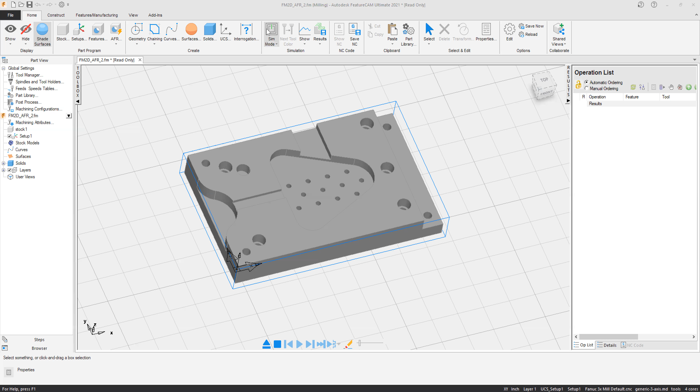You can see some projects with pockets and holes available on the model. We have an option called Features, and within that there are options called AFR and Directed AFR. AFR will automatically recognize all the features in the model and generate the toolpath, while Directed AFR lets you do programming on selected operations.

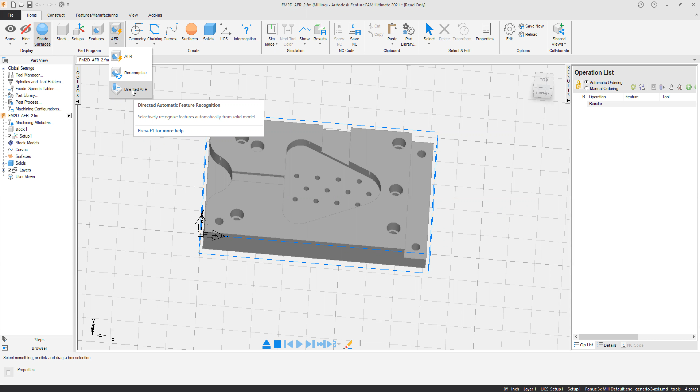Before that, I'll show you how to do the setup for this model. You can go to File and import any kind of model - it supports importing all file formats free of cost.

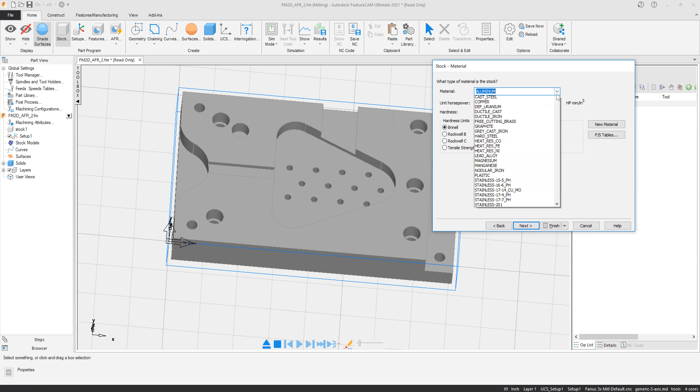Once you import, you go to define your setup called the block. You can define different shapes of blocks and select different materials for what you are going to cut. FeatureCAM automatically selects the tool speed and cutting parameters according to that. Then you select no fourth axis and finish.

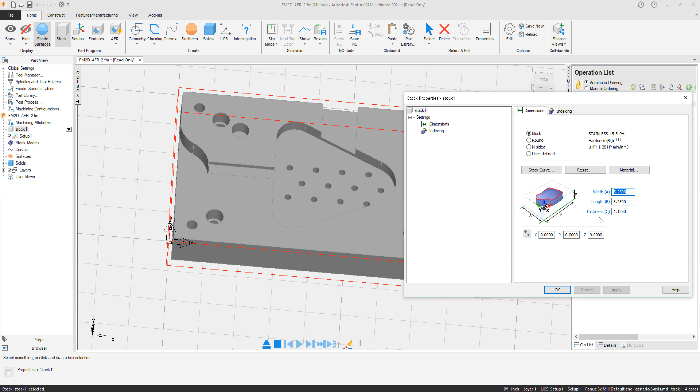Now you can see the block is generated. If you double click on the block, you can see the size - X, Y, Z. These three sizes are available to define the block.

Once you've defined the block, it's very important to define the setups. Click on Setup here and give the setup a name. Then you set your zero position - normal, front, left, right are all available, or you can click the icon as well.

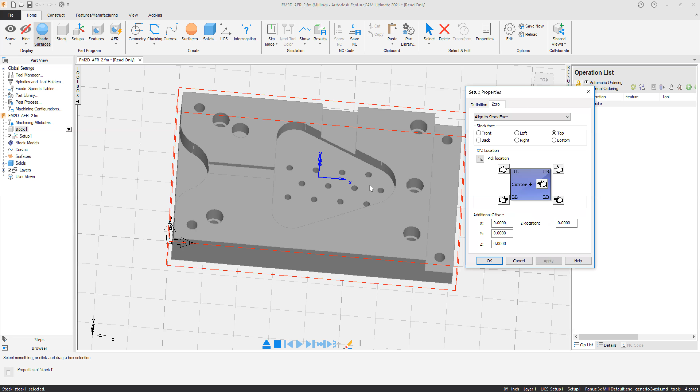Now my XY zero is set to the center in X and Y, and Z is on top. You can also pick any point to set it, or move the XY coordinate using these options, or set it to the left corner, right corner, or center - these are the five options available.

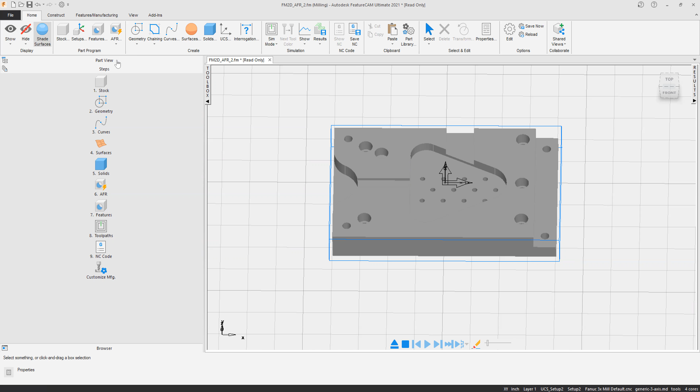Once you set your work plane, you can go directly for toolpath creation. In the steps, you can see the option called Features - there's AFR, you can go for AFR, or it's also available here, or you can go to the Part View, which is also available at the top.

I will go for the Directed AFR. Then we can select it here. It asks what kind of profile you want to recognize - only holes, bosses, or pockets. Suppose I untick all other options and want to do only the holes.

Then it will ask for the diameter - what is the maximum hole diameter you want to recognize, only that much diameter will be taken. There are a few more options you can click to merge into a single hole, if possible. Then go to the next step.

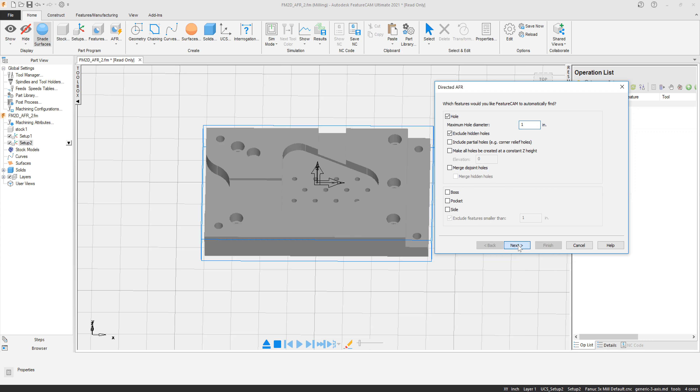Now you can see all the holes are recognized by default. I can see here the through hole, counter hole, or blind hole - whatever types of holes are available, and you can see these are all selected. Then you can finish it.

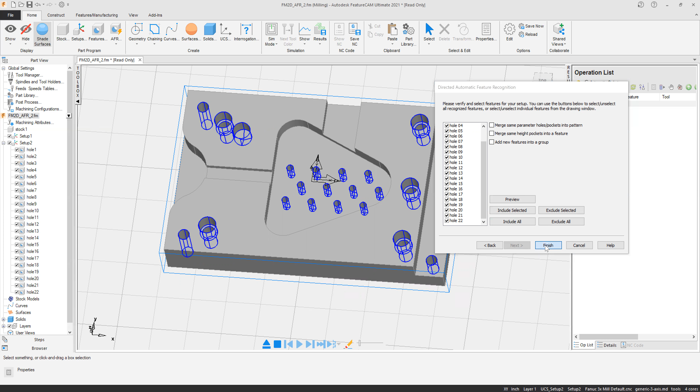Once you click finish, it automatically selects and generates the toolpath - spotting as well as drilling for each hole. You can see it operation-wise. Once you move the cursor, you can understand which holes correspond to which operations - this is the hole, and this is the operation.

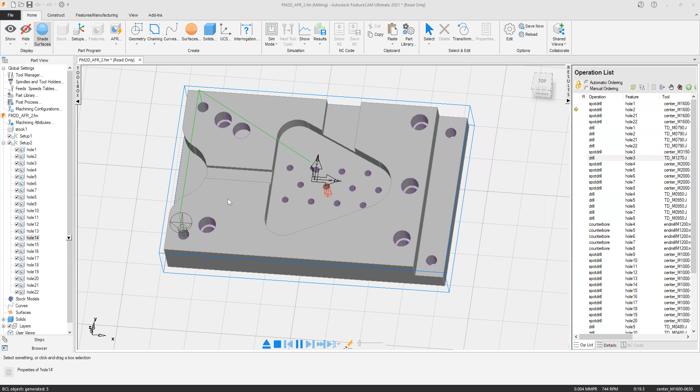Once done, you can see the simulation with wireframe simulation. You can see the wireframe simulation happening here in this area. And once you've done the wireframe simulation, you can also do the solid simulation.

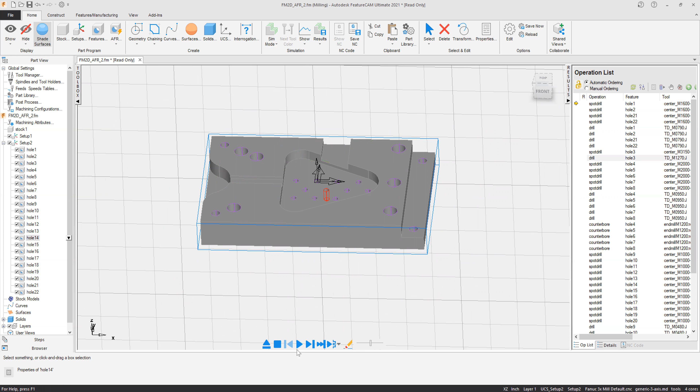I'll skip this - you can do the solid simulation. Click into simulation here, having a 3D simulation is also possible. You can see all these simulations happening - counter bore and all, center drill, counter bore, everything you are able to do.

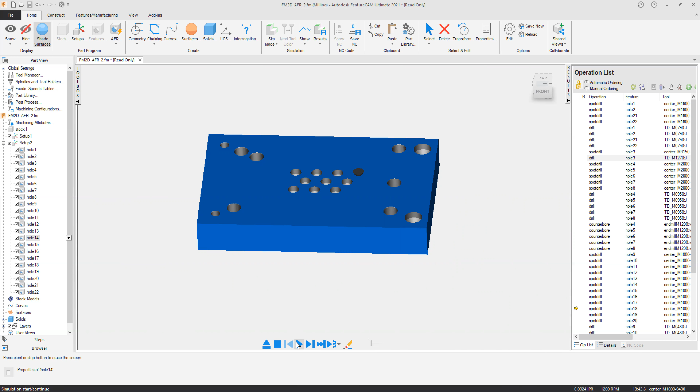You need to do the complete simulation, then only it will generate the NC program. Because here a pocket is already there, that's why it is taken from that bottom.

Once you've done, you can click onto the NC code and it will generate it in your G code. For each hole you can see the spotting, drilling, and so on. Once done, if you want to modify anything, it is possible to modify it.

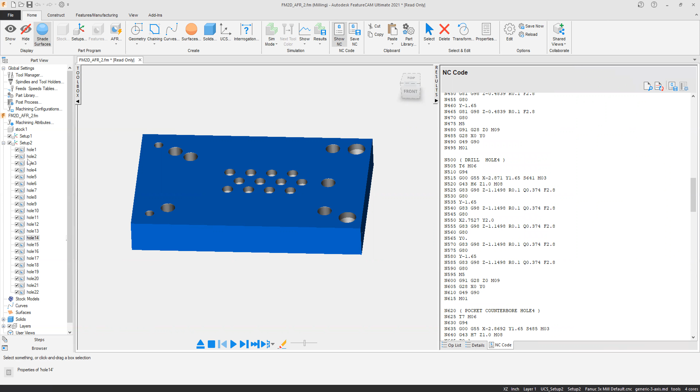Double click on this and you are also able to save your NC program. We have an option here called save NC file. You can click it and save it to a directory.

Before taking the NC program, you can select the post processor here. Click onto this and select the post processor. By default you get all the machine post processors. For the 3-axis, these are all the standard machine post processors.

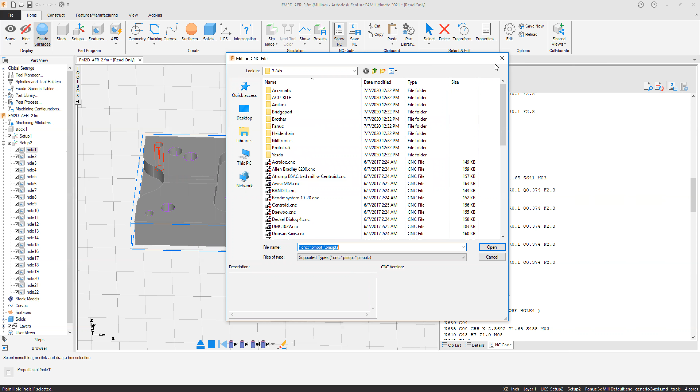Once you select mm and inches, you can write your NC program, and it will be written to your specified location.

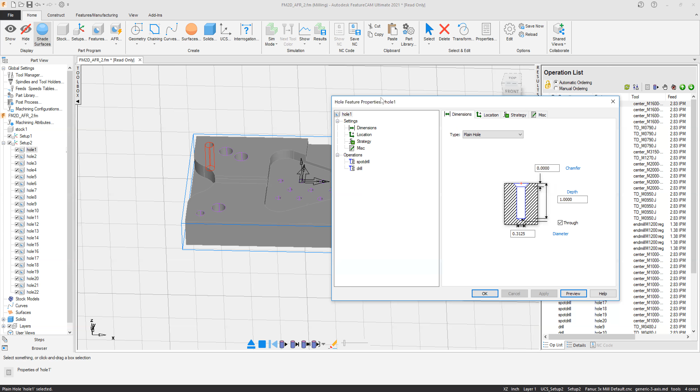Once done, I can go into more detail for editing the tool path. After creation, if you want to edit any parameters, double click on the hole, and you can see the operation, the spot drill and drill for this particular hole.

Here you can see the strategy. If you want to change any cycles like spotting, drilling, reaming, or boring, you can change it, or change all these operations according to your requirement.

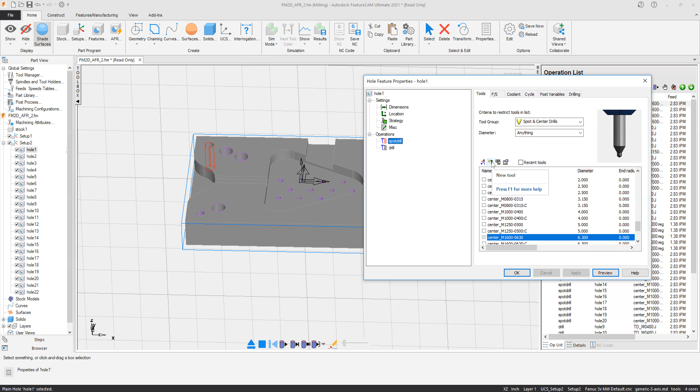Then you can go to the operation-wise settings, where the operations let you see the tools. If you want to change the tool diameter, you can just click it, or create a new tool from the library. You can add this new tool, or change it here.

The speed is also taken depending on the previous material setting. Then there's coolant, and the kind of cycle you want, like spotting, deep drill, break chips, or remove reamer — all of that you can select.

Then you can also use the post variable. For drilling, you can adjust the spot drill depth manually, or add the spotting depth.

It takes the default spotting depth, and you can also go to the drilling settings. Once you select drilling, you can define the peck depth and other parameters. Here we can also standardize.

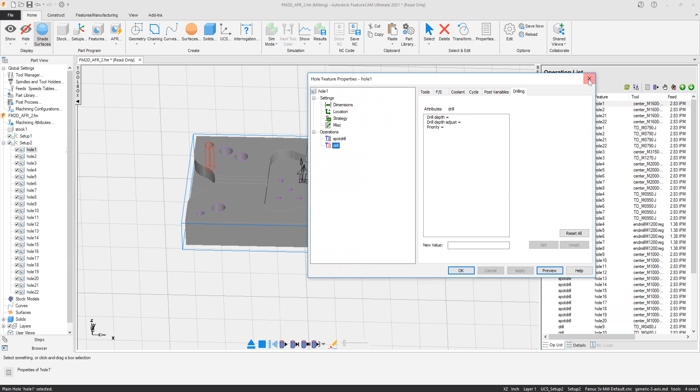If you want some standard parameters, you can go to the manufacturing and machining attributes settings to customize your parameters. Suppose you want drilling or pecking — these are all the parameters you can set.

Once I select drilling, by default all these parameters are taken. If I mention pecking, then the parameters for pecking are taken instead, or you can change it for drilling.

For example, if you want to drill the large counterdrill first, it will take these options — the large counterdrill will be done first, then counterbore before the drill. If you want drilling before the counterbore, you can click this and it will automatically follow your operation sequence. You can also change these options.

Here you can see a few more options.

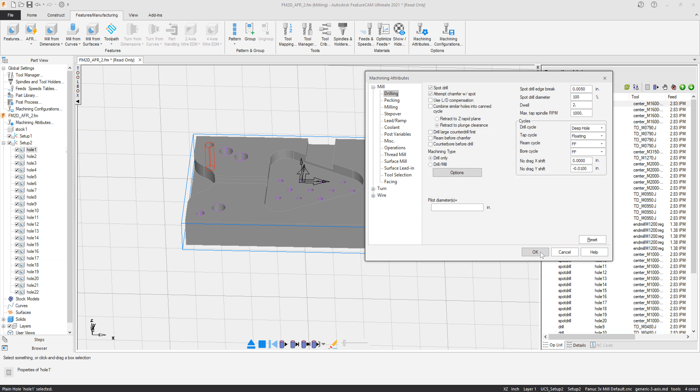You can also set the spot drill diameter as a percentage, which helps choose it automatically when you mention the percentage. This is the manual selection, or you can do other operations as I mentioned before.

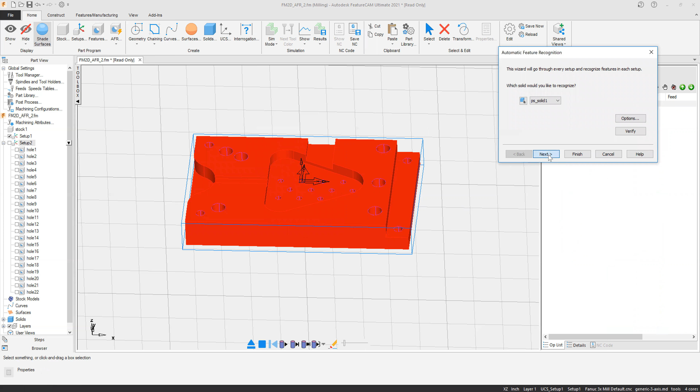Suppose you don't want to do the side, you can untick it. Then you can say finish preview. Also you can finish it. Then you are able to do the full machining. Like it will untick this.

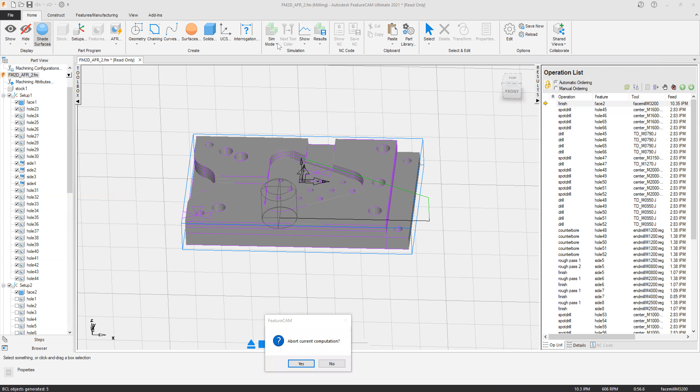Suppose I want to do the 3D simulation, I can see it here. It will do the facing as well as the drilling and spotting. Then it will do the pocket machining, side machining. Then accordingly it will do the bottom drilling and the inside pocket drilling. Okay, this is then the side machine. This is the AFR for automatic feature recognition.

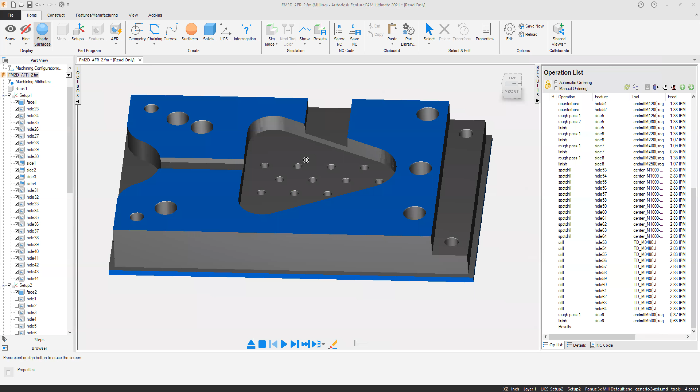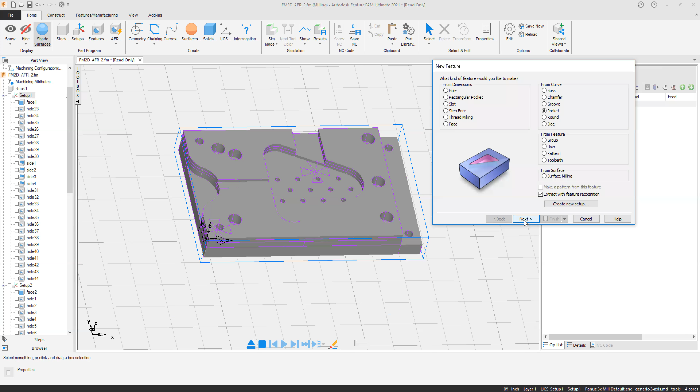Okay, this you want to use for your 2D kind of profiles, or sometimes you want to do the manual programs. Okay, suppose I will just untick this. Suppose I want to do the manual operations. Okay, you can go for the features and you are able to select here the pocket, and then you can extract the feature recognition. Click this feature recognition, then automatic. Okay, now you can see these pockets are automatically selected.

Then you select it. Now it will do the toolpath only for this pocket. Okay, like that, if you also want to do the side, I am able to do it for the side. Okay, now you can see this is only the pocket toolpath, roughing and finishing, that is going to be generated. Okay, like you can do the particular pockets or particular area you want to machine, or now I want to do this side machining,

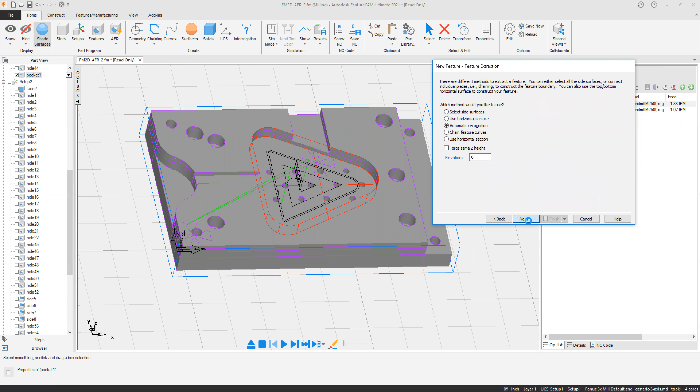then I can go to the side, then select, then you can see here it will automatically, whatever side I want to only do, this one, select only this one, then you can finish it. Now it will generate the toolpath only for this side. As I mentioned, you want to select only the side. Now you can see this pocket and this side only you can machine. This is very much compatible to do the programming.

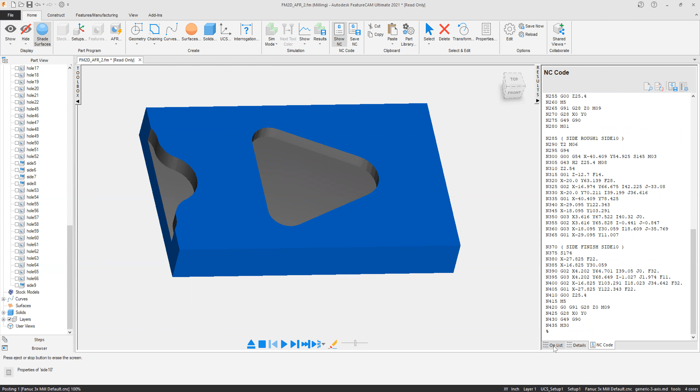If you want to do the simulation, you can take the particular operation and simulate it, or you don't want to do other simulation. Now it will generate only the toolpath for these two pockets. Okay, once you did, then you can see the operation list. You are able to see what operations are available, and for the roughing pass also you are able to modify the depth of cut.

You can see here the radius of the tool as well as the Z incremental. Suppose I want to go by 1 mm, we can set it. Now it takes the roughing 1 mm every Z pass, then you can change the finishing. And also we have an option to change the allowance for the finishing, how much allowance you require for the finishing, you can see here, and enter the value.

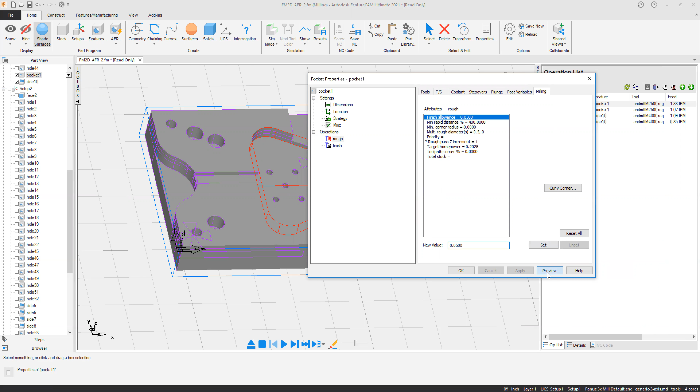FeatureCAM is basically for feature recognition. In this video I am covering how to do the toolpath for drilling and pocket automation. You can use it for your day-to-day activities without spending much time, because we can do a lot of parameter customization according to your requirement. You can change all the parameters, and for milling you can set some of the parameters, then the toolpath will follow according to operations like facing.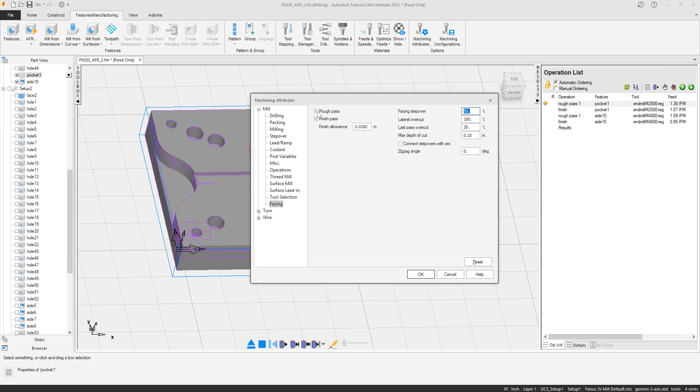For how much step over the tool will take, it will automatically take 85% of the tool diameter, or if you want to add a rough pass before finishing, you can add it. Like that you can change the machining attributes according to your requirement. Okay, I hope you understand how FeatureCAM automatically recognizes features.